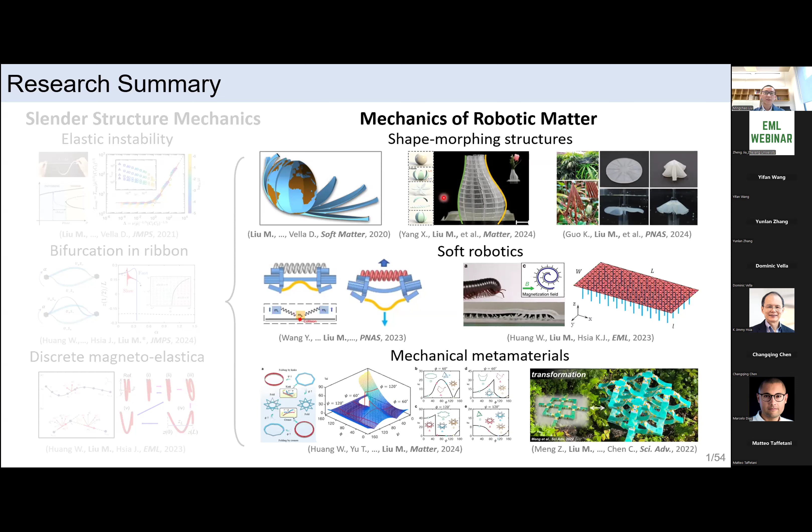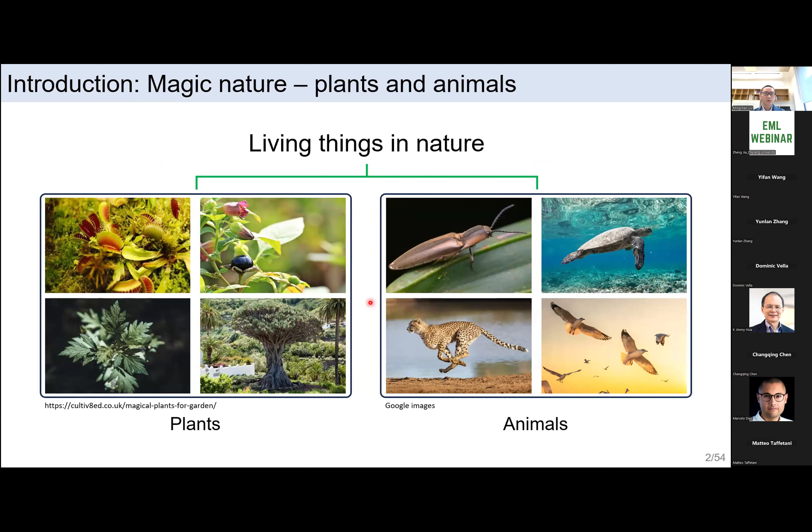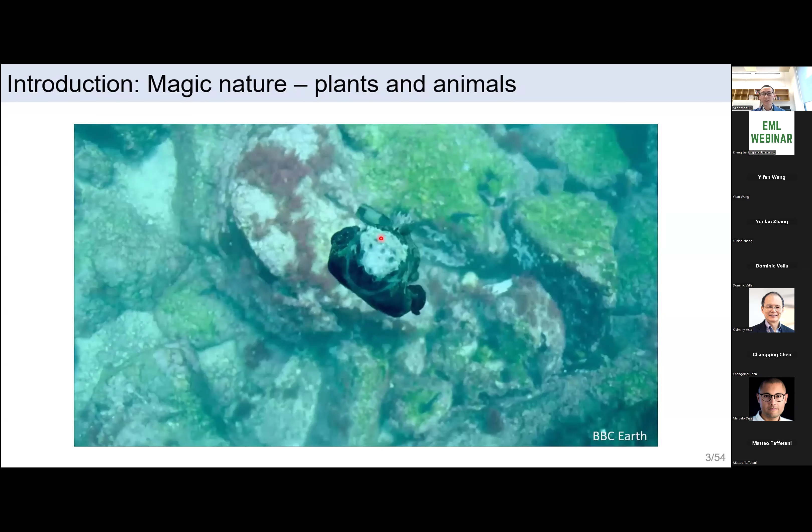First, let's look at the magic of nature. When we walk outdoors, we can see many living things, such as various plants with diverse flowers and leaves, as well as different types of animals and insects. Through millions of years of evolution, they have developed rich morphological features and efficient locomotion modes. I borrowed this video from BBC Earth, showcasing the extraordinary animals and plants in nature. Watching this video, I was amazed by the greatest wonders of the natural world. It made me think about how we can learn from nature.

It's really amazing. Saying we can make our life better might be too ambitious for a short period of time, but we can certainly explore how we can learn from nature to improve our engineering design. This is a question we would like to briefly answer in this talk.

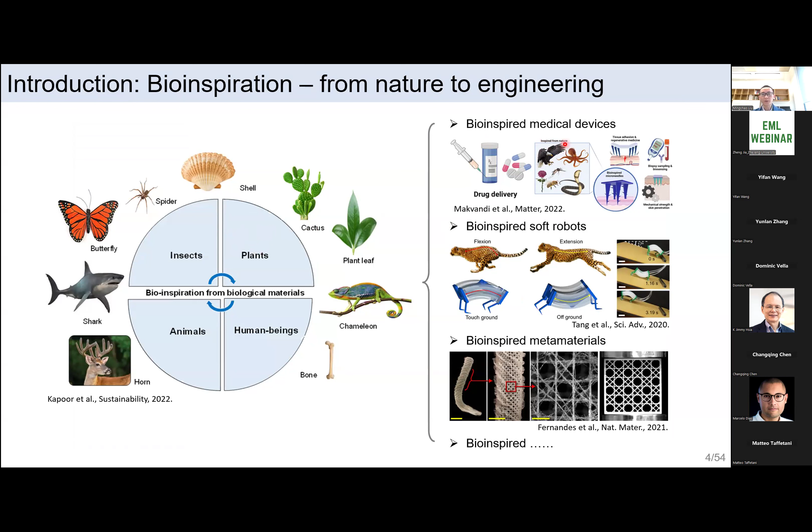In recent years, there have been many explorations in bio-inspired design, such as bio-inspired medical devices, bio-inspired soft robotics, and bio-inspired metamaterials. One particular question we aim to answer is: how can mechanics help us understand and mimic biological systems? We will start our journey in this little garden.

Our first example is the design of a morphing structure with foldable behavior, inspired by bamboo leaves—I will explain in detail later. When we talk about morphing structures, you may think about transformers. Indeed, the transformer is a very typical example of a morphing structure, but it is quite advanced. In a real research lab, what we study recently is much simpler.

For example, this is a lattice structure which can change its topology by responding to external stimuli, or even simpler, a tubular structure that can be deformed by stretching. We can refer to these as morphing structures.

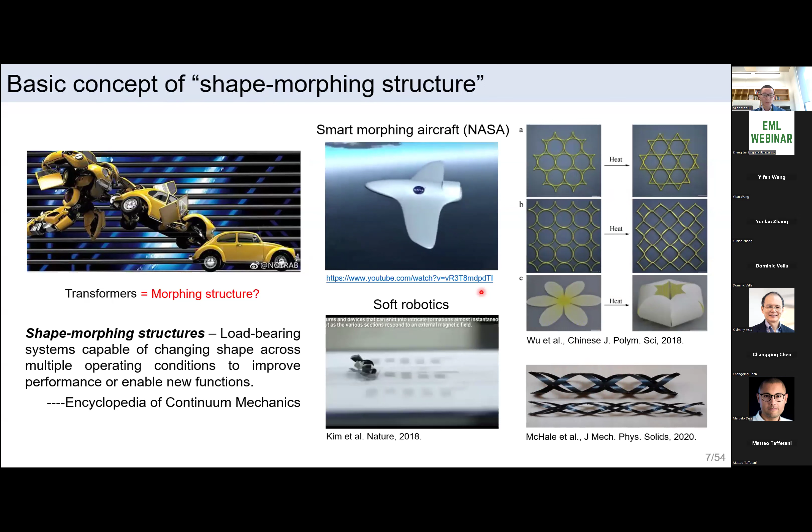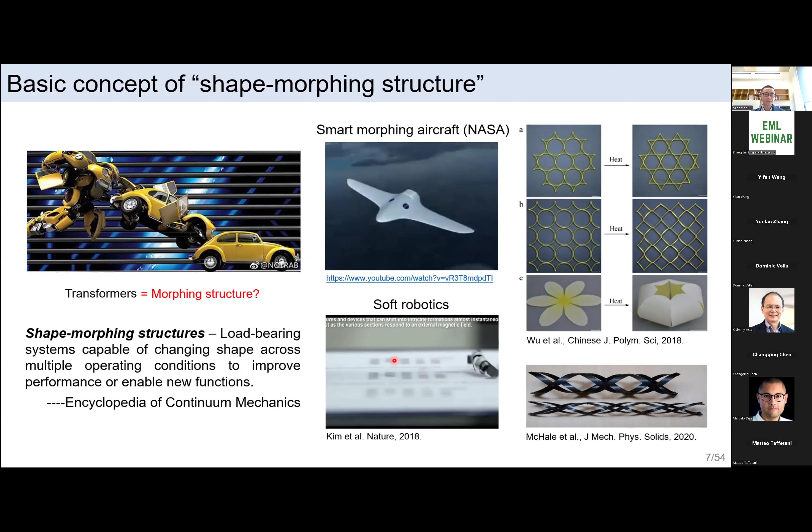The reason we are interested in morphing structures is because they have shown great potential in research areas. For example, if we have an airplane with a morphing wing, it can be much more energy efficient, and morphing structures can be applied to soft robotics to perform more diverse functions. As mentioned before, plant leaves exhibit rich morphological features, providing great inspiration for creating morphing structures.

For most of the leaves, the shape formation is based on stress mismatch, similar to this bilayer system. This stress mismatch is triggered by the differential growth of the cells. A notable characteristic of those leaves is that their shapes are normally smooth, as you see in those examples - you cannot see any sharp change of curvature. So one natural question arises: how can we achieve localized shape change?

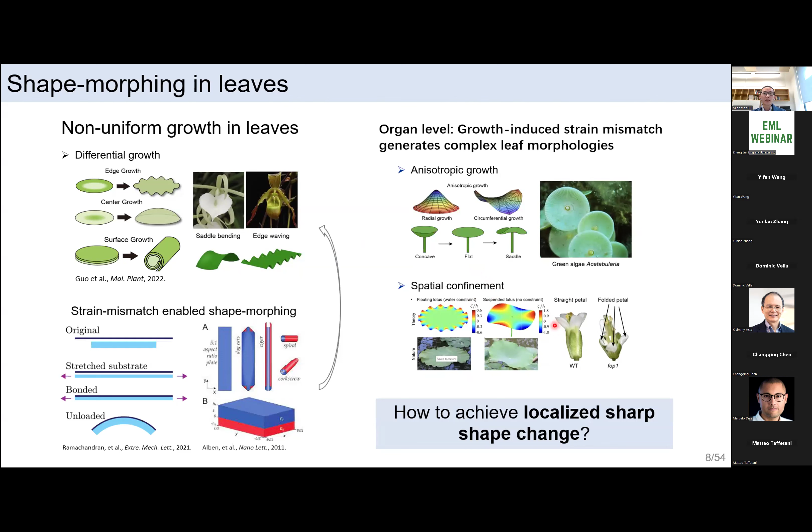The answer came to me one day when I was working on the campus of NTU in Singapore. This story goes back around two years. I still remember after a group meeting with Jimmy, I was walking from the office to my apartment. I noticed a dry leaf of this kind of plant, named Rhapis excelsa, which is very common in Singapore and also in some southern parts of China and in Taiwan. It showed a significant folded shape.

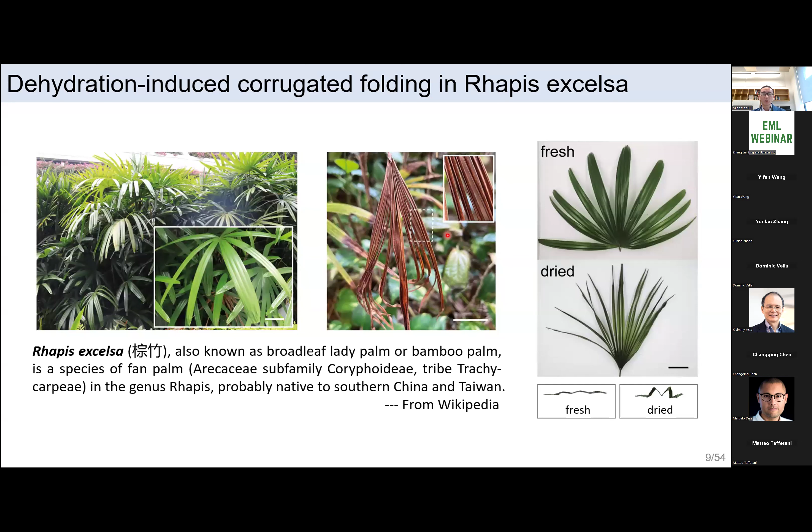Compared to the fresh state, the shape changed quite a lot. Initially, in the fresh state, it's almost flat, but in the dry state, it forms a very significant zigzag shape. This is a common folding behavior, and you may also observe it elsewhere. So what we wanted to do is understand the reason for this kind of folding, and how we can learn from it.

This is intuitive because, for the cut leaf, the water mainly evaporates from the exposed cut edges. For longer samples, the liquid needs to transport from the center to the edge, but for shorter samples, the liquid evaporates more easily from the edge.

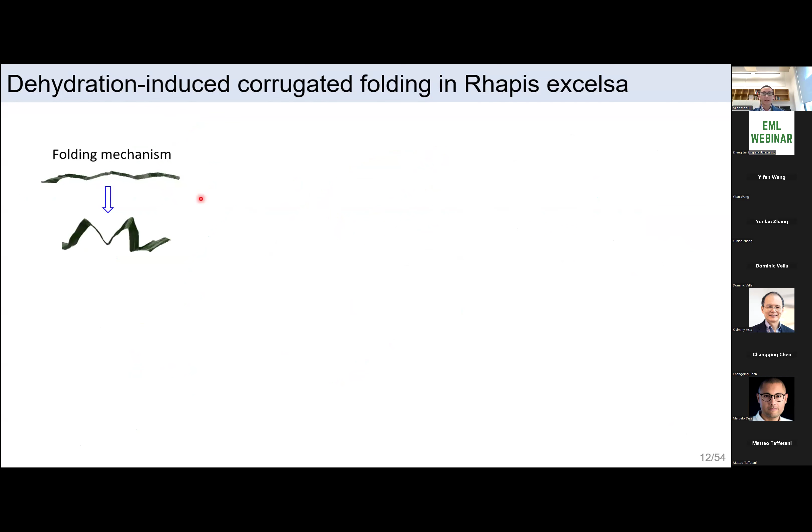So next, we want to understand the folding mechanism more clearly. By taking optical images, we can identify the most significant volume change happening in this area, which we refer to as the hinge cell.

All other areas also involve shrinking, but not as significant as the hinge cell. This circular area is a vein. You may know that in the leaf, the vein is rigid—it cannot shrink during drying, it keeps its rigidity and volume. That means the strain mismatch between the hinge cell and the vein will contribute to the folding of the leaf structure.

To test this hypothesis, we developed two FEM models. In the first model, we only introduce the vein structure, which is rigid and will not shrink during drying, while the other part shrinks. Here we use thermal strain to reflect the volume change. When we make those two parts shrink up to 40%, we didn't see any significant folding.

In the next model, we introduce a hinge cell, which reflects this hinge cell region near the vein. The hinge cell shrinks more significantly than all other cell regions. With this hinge cell, by applying the hinge strain, we can trigger very significant folding. These simulations confirm that the folding is mainly induced by the shrinking of the hinge cell.

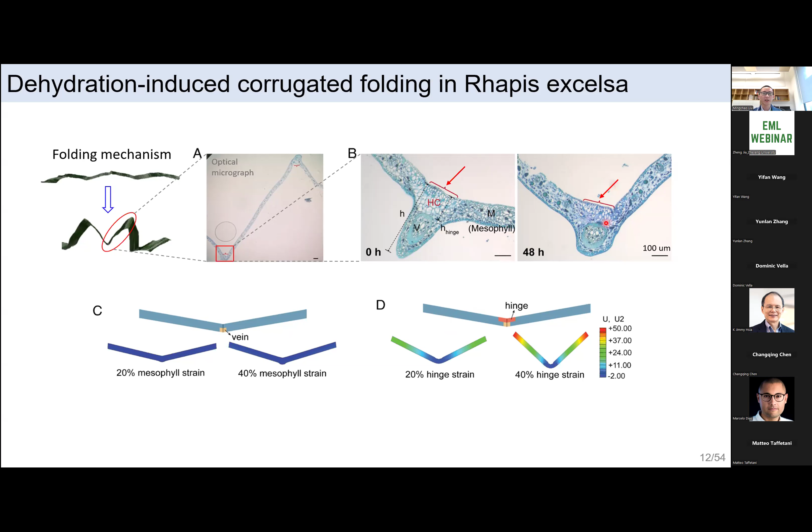Except for the folding, we also observe the bending of the leaf, such as this part. By taking images of the adaxial cell and abaxial cell of the leaf—the adaxial cell being the surface facing the sunlight, and the abaxial cell being the surface opposite to the sunlight—we find that they have quite different surface properties.

For the abaxial surface, it has quite a lot of stomata, small holes that enhance the evaporation of water. That means during the drying process, this surface may shrink more than the other side. By accounting for these features in our FEM model, we introduce a bilayer model where the adaxial side shrinks less than the abaxial side, and we can achieve this kind of bending similar to what we observed experimentally.

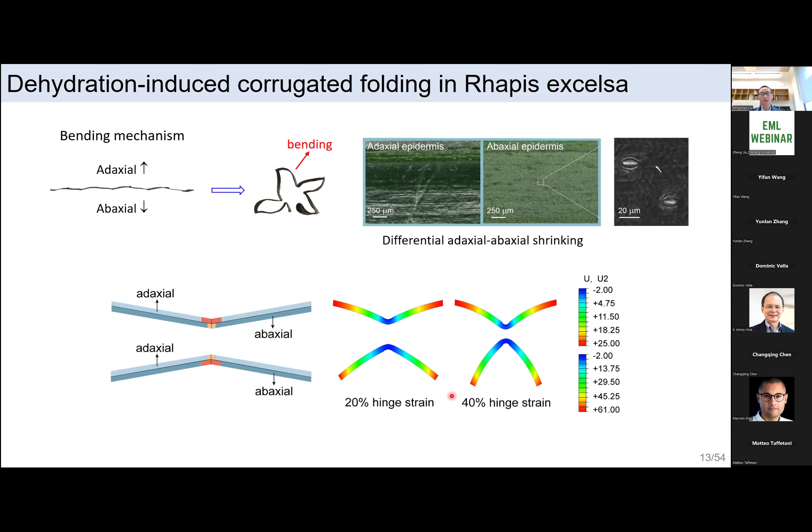Since the abaxial side always shrinks more than the adaxial side, those leaves always bend to the bottom side. So if we combine our understanding of the hinge folding and the bilayer bending into our FEM model, we can fully reproduce the morphology evolution of the leaf during dehydration. It shows that our FEM simulation agrees quite well with the experimental observation.

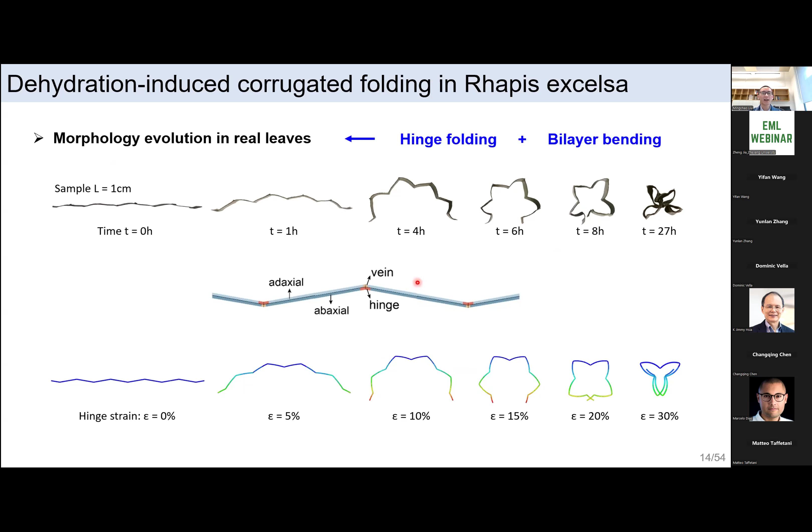So far, from our point of view, we think we understand what's happening with the folding in this particular leaf. You may be wondering what's the reason for this kind of folding—why does this leaf want to fold?

To be honest, we cannot answer these questions properly, but here we propose two potential reasons, which we refer to as the potential biologic functions, to explain why the leaf wants to fold. The first is that folding will increase rigidity through geometric constraint, which can be reflected by a simple piece of paper—if you introduce hinges, the rigidity will increase a lot.

The second reason is that the folding plus bending of the leaf will reduce water loss. This is also confirmed by our control experiments. Both mechanisms help the plant survive in extreme environments. So this is our hypothesis.

Based on our previous understanding of the folding mechanism of the leaf, we can create a biomimetic foldable device. We combine EcoFlex with hydrogel. The hydrogel is initially fully saturated with water. During drying, the water evaporates and the volume shrinks, forming a strain mismatch. This induces bending and folding.

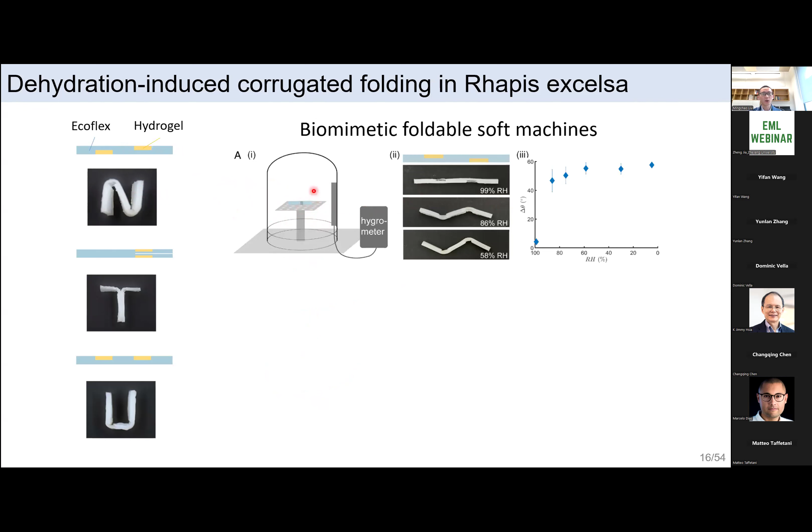By applying this kind of design, we can create a device that can be used to detect and measure humidity in the environment, since the folding angle depends on the humidity.

So another example is that we can create this kind of responsive umbrella. The working principle is that it will fold upon drying. For example, in a sunny day, your umbrella will fold by itself. When it is raining, it will unfold spontaneously, so you don't need to worry about the rain. We hope that this kind of smart machine will be used in our daily life in the future.

Foldable structures exist widely at different scales, such as protein, DNA, and brain, all involving quite a lot of foldings. Instead of those natural structures, in engineering, foldable structures also show great potential for applications such as foldable wings and foldable solar panels. For those applications, normally we need to consider the dynamics.

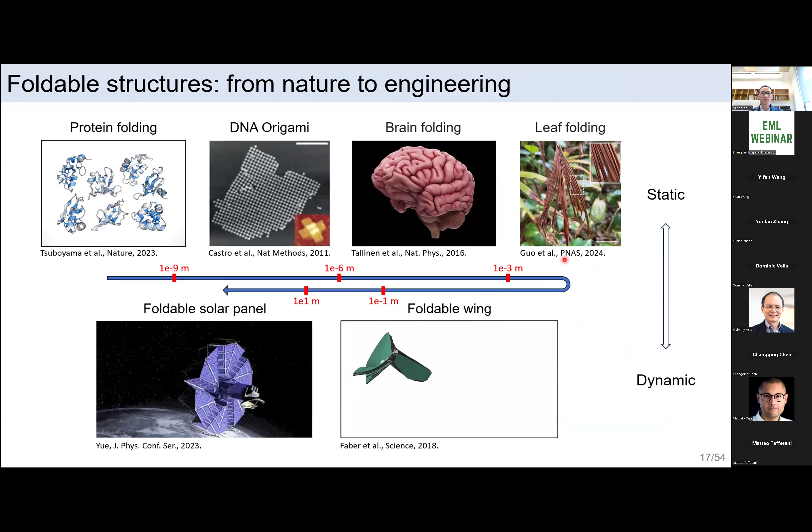Here are two examples of foldable structures. If you check those foldable structures in detail, you will find that most exhibit a single mode of folding: either continuous folding or snapping folding. For continuous folding, it is stable but normally slow. For snapping folding, it's fast, but normally it will induce a strong vibration. So we are considering whether we can achieve a foldable structure with tunable folding, meaning we can transition from one mode to the other or the other way around.

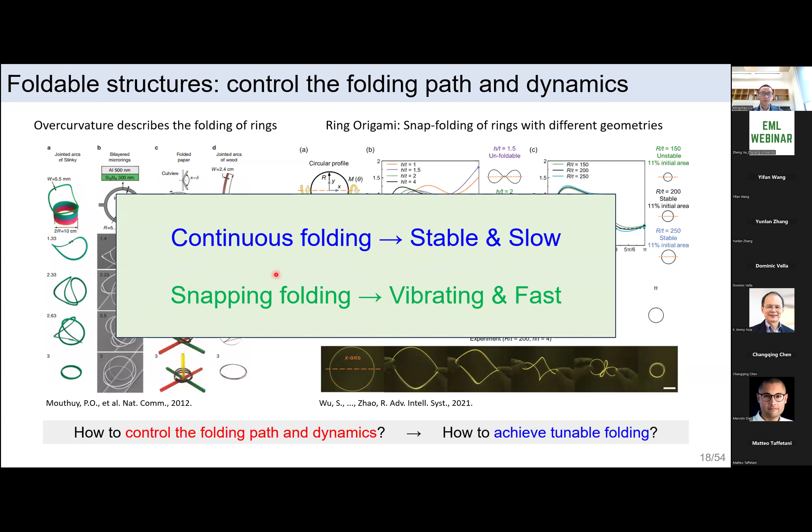For this purpose, we proposed a concept called the meta ribbon. I will explain it in a little detail. As shown here, we found that if we introduce in-plane kinks into our annular ribbon, as you see here, we can trigger continuous folding. It's quite smooth and stable.

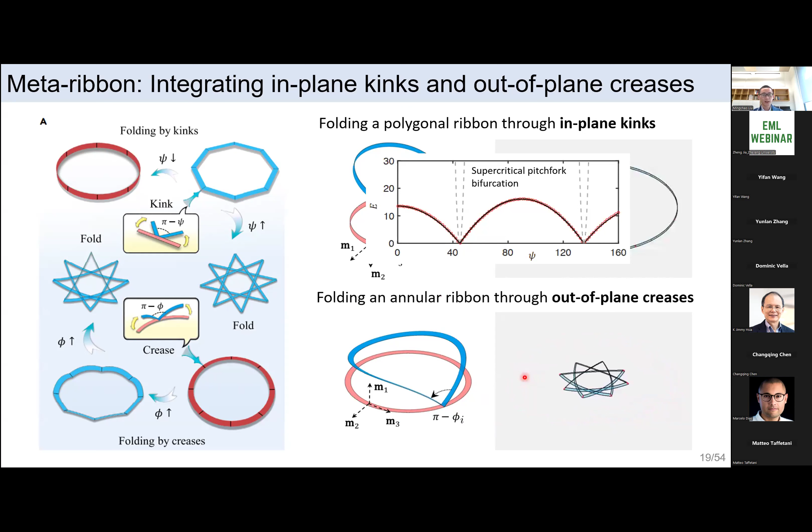We did some stability analysis and found that this kind of smooth continuous folding is governed by the supercritical pitchfork bifurcation. On the other hand, if we introduce out-of-plane creases into the annular ribbon, as you see here, we can trigger snapping folding, which is quite fast. Here we don't consider dynamic effects, so you don't see the vibration - I will show that later. By doing the stability analysis, we found this is governed by the subcritical pitchfork bifurcation.

By integrating the in-plane kinks and out-of-plane creases together into a single ribbon, we can create this kind of meta ribbon. So the foldable behavior of this meta ribbon is tunable, as we mentioned.

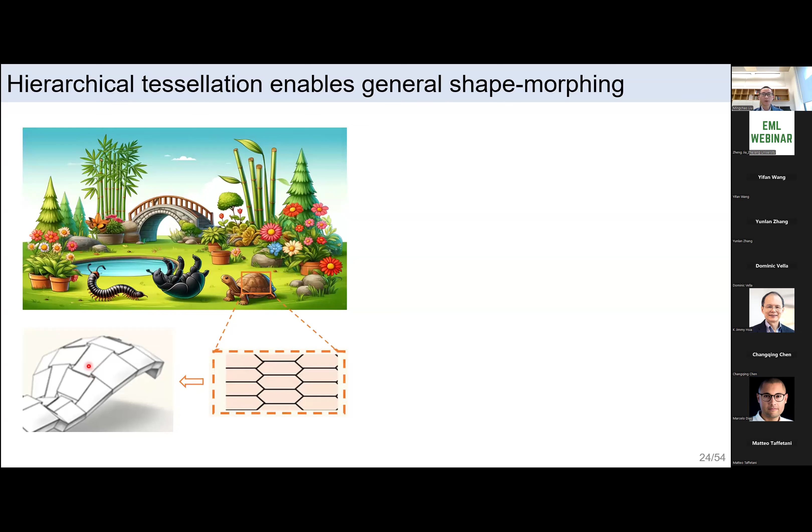This kind of principle has been adopted in old days. For example, this arch bridge is made by stone bricks with particular shapes. This arch shape can be formed by assembling those stone blocks together, each with particular geometry.

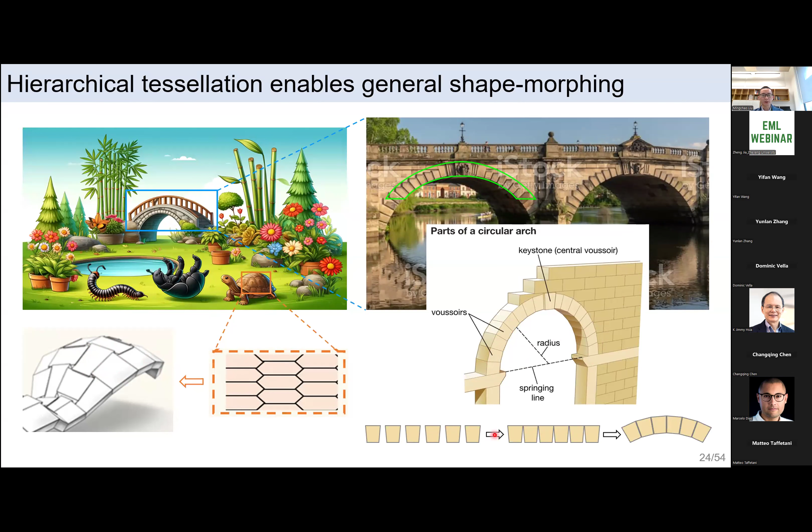So we can use this kind of principle to design a morphing structure. This principle only involves a geometric relation without any elastic information.

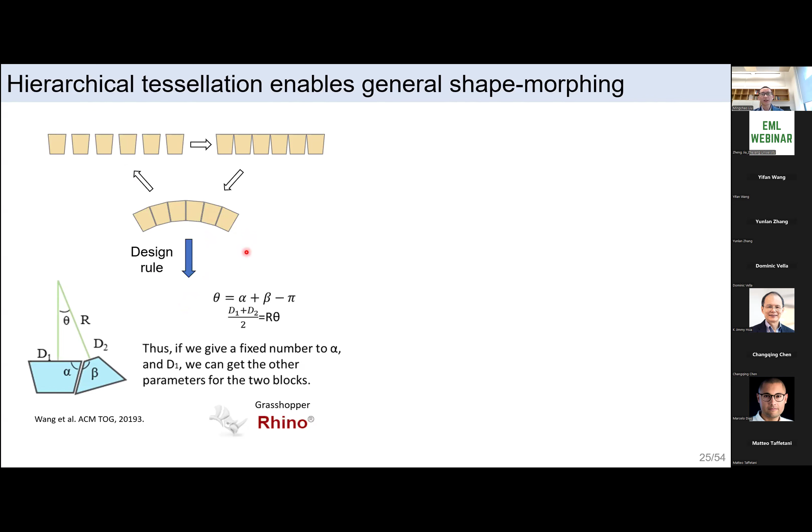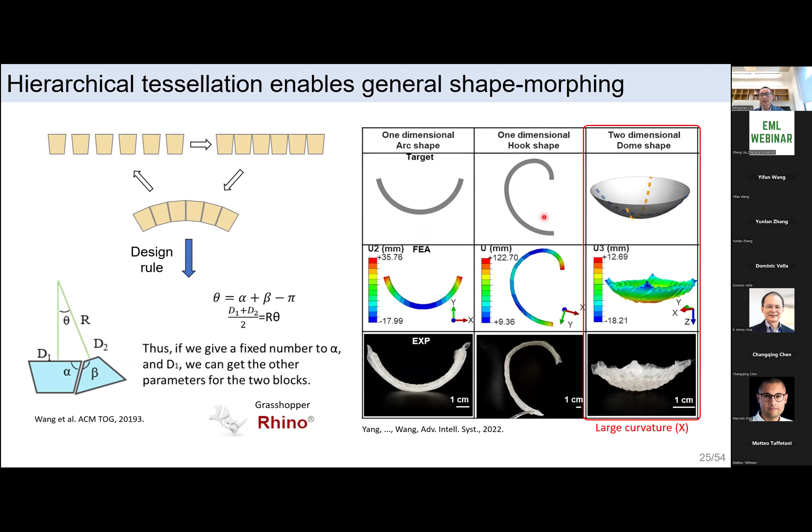This principle has been tested by Yifan's group. They tried to translate those 1D and 2D structures into particles, and by controlling the geometry of each particle, the curvature can be matched. In experiments, they printed all the particles and put them into a plastic bag. By vacuuming the bag, all the particles will be squeezed to stay together, and then they can form the target shape. For 1D geometry it works quite well, but for 2D it's quite challenging to form a large curvature. The reason is quite simple.

According to the Theorema Egregium, if you want to deform a flat shape to a curved one, you need space to store extra materials. So you can imagine that if you want to design a full sphere using this kind of way, you will encounter problems since there's no space to store the materials of the bag.

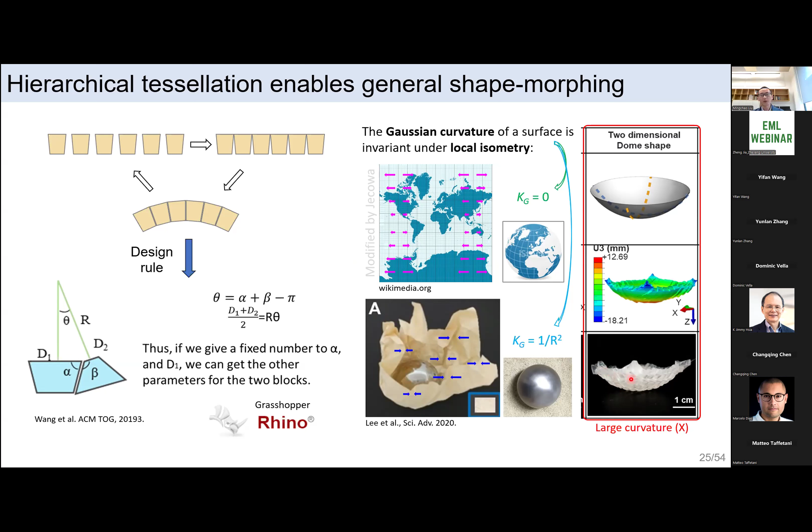To overcome this problem, we get inspiration from biological systems. So we propose a new design principle named hierarchical tessellation. What we are doing here is choosing a sphere as our target. We first cut it into multiple pieces at the global level.

Each piece is in a curved state. To match the curvature, we tessellate this curved piece into individual particles at the local level. If we assemble all those particles together, we can match the curvature of each piece. This is similar to what we mentioned about the arch bridge. If we assemble all those particles together, we can form the target shape.

This kind of design is quite simple, and each particle can be fabricated using 3D printing. So it's quite easy. You can choose how many particles you use — more particles, or more pieces you cut, will make the final structure closer to the target.

We can also introduce geometry interlocking, which will enhance the rigidity of the morphed structure. Here we show a simple example.

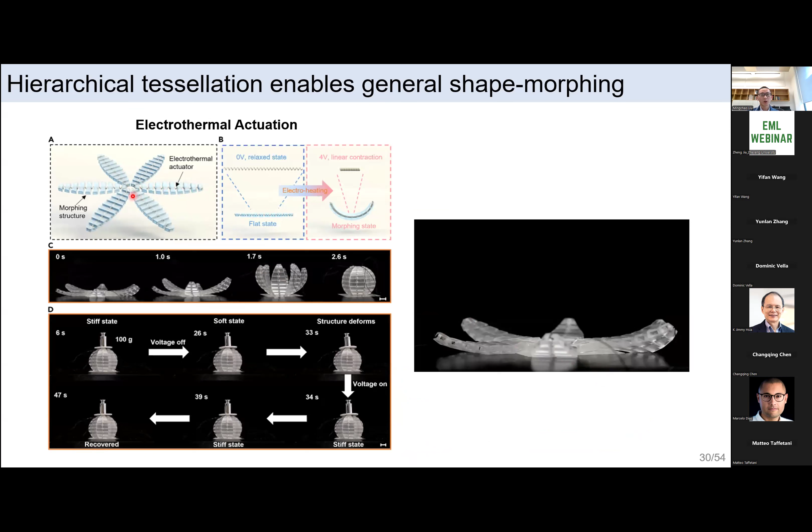Those wires are stretched initially, and when we apply voltage, they get heated and become shorter, triggering the morphing. So we can also change the stiffness of the morphed structure by controlling the voltage state.

The final thing I'd like to highlight for this kind of morphing structure is that it can be applied to electric devices. As we know, fabrication of curved electric devices is a major challenge.

But here we fabricate all the particles in a flat state. That means we can easily print electric circuits on the planar state like this, and then make it morph to the 3D shape, performing the function in the 3D state.

Here we show one example. We printed the circuit and integrated an LED light onto the morphing structure at the flat state. Initially it's flat, so each particle is separated, and the circuit is not conducting.

Once it morphs, the particles will contact their neighbors, so the circuit becomes conducted and the LED light turns on. When you release the actuation, the particles separate again and the LED light turns off.

So far we have shown two examples of bio-inspired design of morphing structures assisted by mechanics principles. Actually, other mechanics principles can also be applied to design morphing methods, such as strain mismatch, elastic instabilities, origami, or kirigami. Today, due to time limitations, I only include two of these mechanisms.

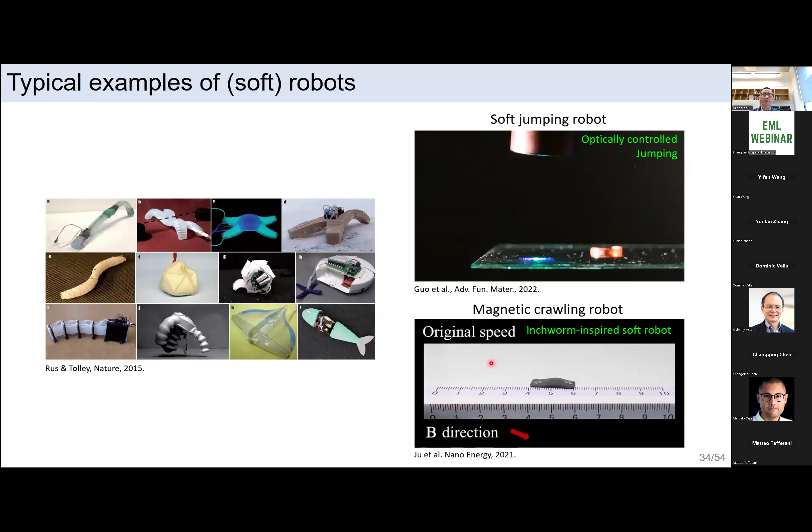There are two examples: the top one is a jumping robot triggered by light, and the bottom one is a crawling robot triggered by magnetic field. Let's first look at the jumping robot.

We would like to design a jumping robot with high efficiency. As we know, for humans, what we do is a squat jump. This kind of mechanism mainly relies on the energy release of our muscles. To be honest, this is not so efficient.

So when we look back at the garden, we found an excellent jumper—an insect famous for using its body in a spectacular way to get off the ground: the click beetle, which can utilize its back and feet.

The snap-through ability releases pre-stored energy, and as you see, it can jump quite high—even more than 30 times its body length. Compared to humans, it's quite excellent.

So we are wondering, can we design a jumping robot by mimicking this kind of mechanism? The answer is yes. A group from UIUC led by Sam achieved this kind of design. They drew inspiration from the click beetle and designed an insect-scale jumping robot. The design is quite simple, as you see here. This is an elastic beam, made from steel in their experiment.

Initially this beam is flat, so we can compress it to make it buckle into a curved state. On top is an artificial muscle that will shrink when we heat it up. At the critical state, when you heat the muscle up, it will deform the two edges of the robot body, forcing the beam to jump from the top to the bottom while snapping through.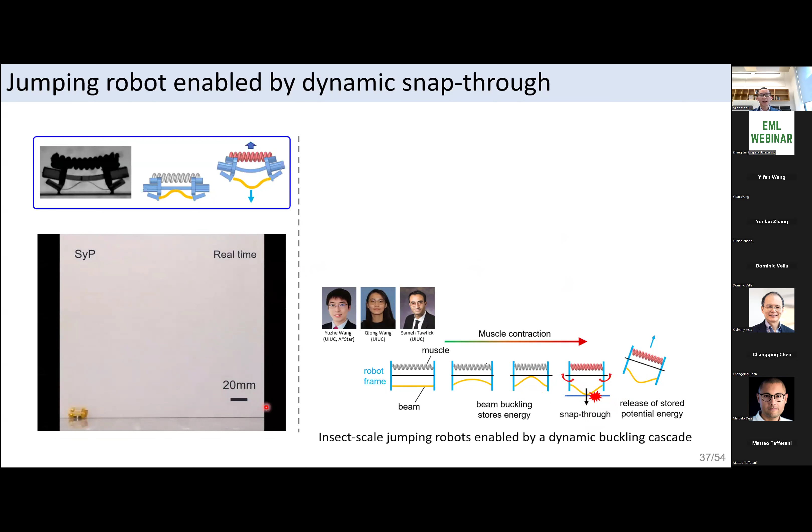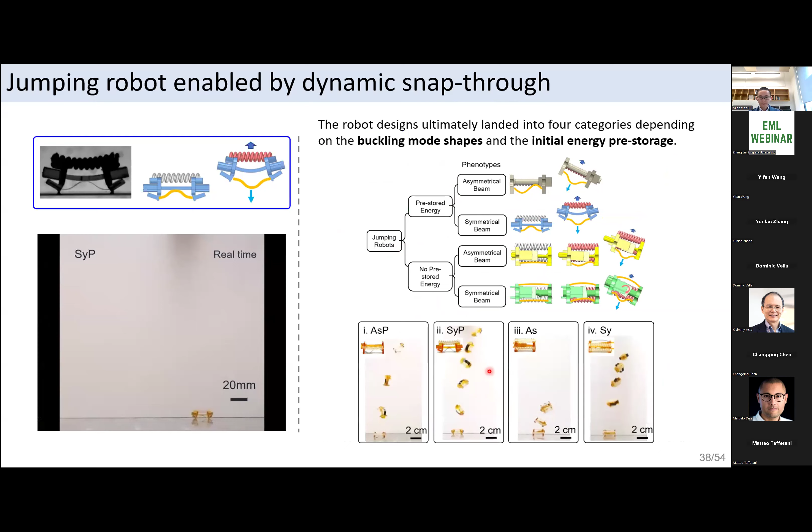It's fascinating. Since we had done some fundamental work on the dynamic snap-through of beams with Dominic and Michael, Sameh contacted us to see if we could work together to develop a search model to predict this tiny jumping robot's performance. Based on this design, 4 types of robot can be developed depending on the buckle shape of the beam and whether there is pre-stored elastic energy. They all show good performance. Our goal is to develop a model to predict the jumping performance.

One option is to consider the full process of this deformation from here to here, which also involves dynamic contact. But here we didn't adopt this option. Instead, we tried to simplify the robot system into a mass-spring model like this, which is quite simple. The key components are 2 masses: a central mass corresponding to the beam, and an edge mass corresponding to the body.

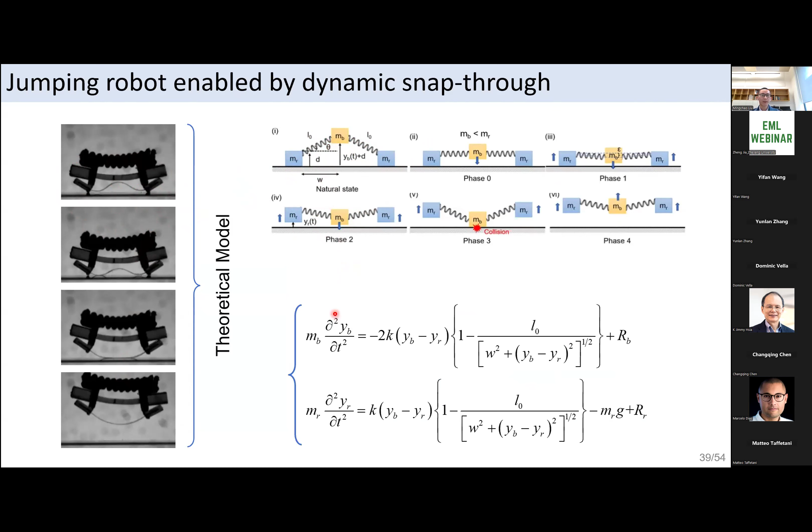The energy stored in the beam is reflected by the deformation of this spring. So we can easily write down Newton's second law to derive the kinetic equations for those 2 masses, and then by applying different boundary conditions, we can solve this system easily.

Here we show that our model can predict the experimental data quite well. This data is the displacement as a function of time for 4 different types of robot. One thing to notice is that there's a free parameter K, the stiffness of the spring—it's a fitting parameter that we need to fit from the experiment data.

What we did is choose one experimental data point to do the fitting, then use that fitted value to predict the whole group of data. It shows that the agreement looks quite good. We can also predict velocity as a function of time, which also agrees quite well.

Based on the velocity results, we can also calculate the acceleration, as you see here. The maximum value of the acceleration is quite high—even up to 250 G. It's a huge value.

One thing we can highlight here is that by using our model, we can do the optimal design of this kind of robot. For this robot, one key parameter is HR, which measures the distance between the bottom center point of the fully snapped beam and the edge of the body. We refer to this parameter as the restricting height.

This kind of millipede robot, as you see here, millipede insect, is quite interesting. To mimic its locomotion, a lot of designs have been proposed. One particular example is the magnetic cilia robot. Here, those legs are made by magnetic responsive materials. By applying a rotational external magnetic field, as you see here, those robots can move through either the rolling mode or the crawling mode. These experiments are really beautiful, to be honest.

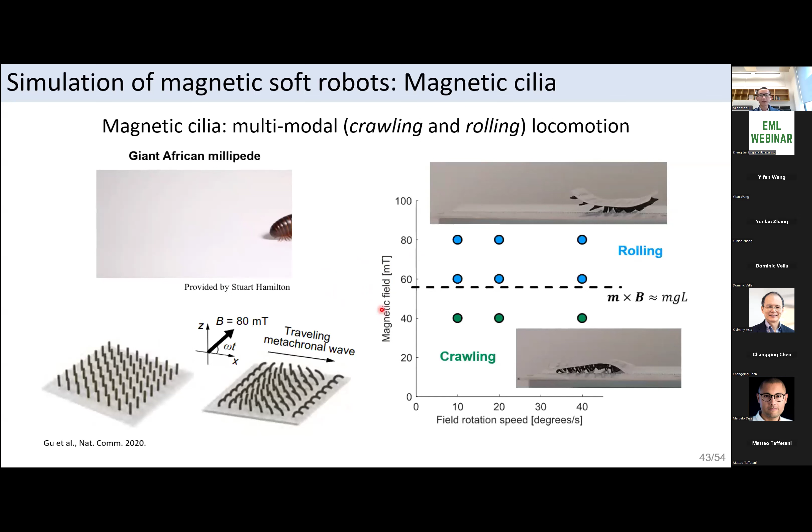But one challenge is how to efficiently design a robot with good performance. The traditional way is by doing trial and error in experiments, we do 10, 20 rounds of experiments to check which group of parameters is more efficient. So what we are thinking is to develop an efficient numerical framework to simulate the robot behavior.

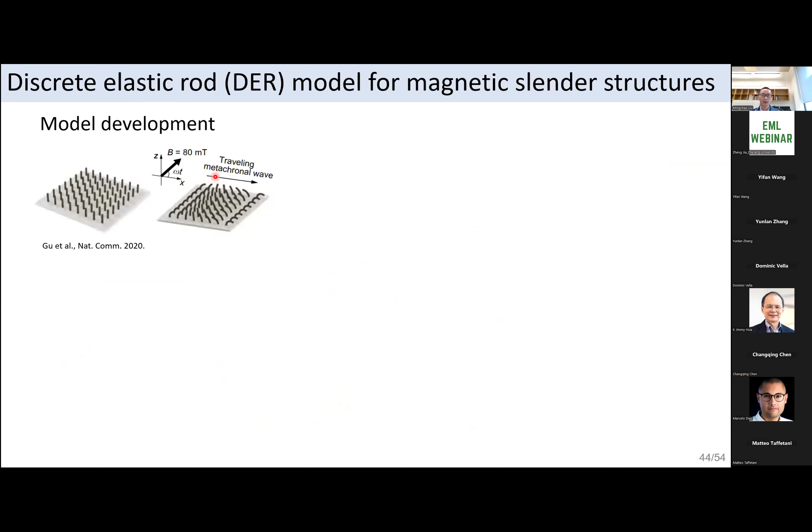Here we adopt a framework based on discrete differential geometry. This type of method is popular in computer graphics, for example in making movie special effects. Recently it has been adopted in the solid mechanics community. Here we include the magnetic elastic coupling into the discrete elastic rod framework.

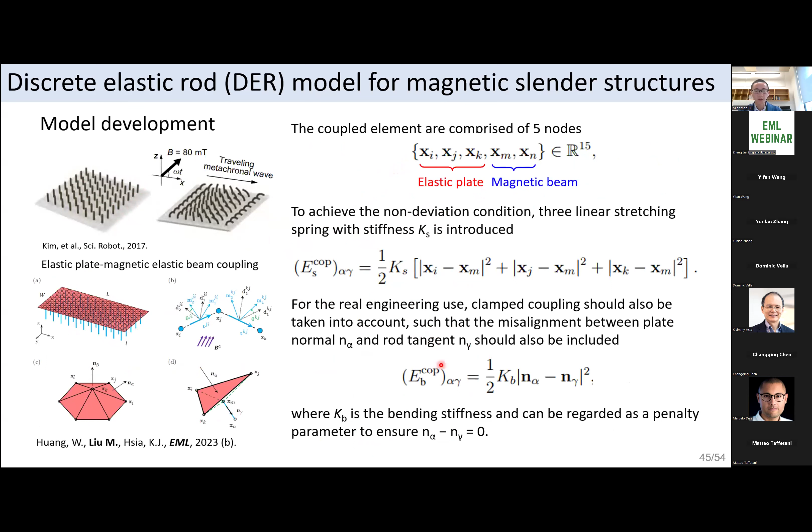We also need to introduce elastic plates and consider the interaction between the rod and the plate. So here we write down the coupling energy for both stretching and bending, and then we can solve this system numerically.

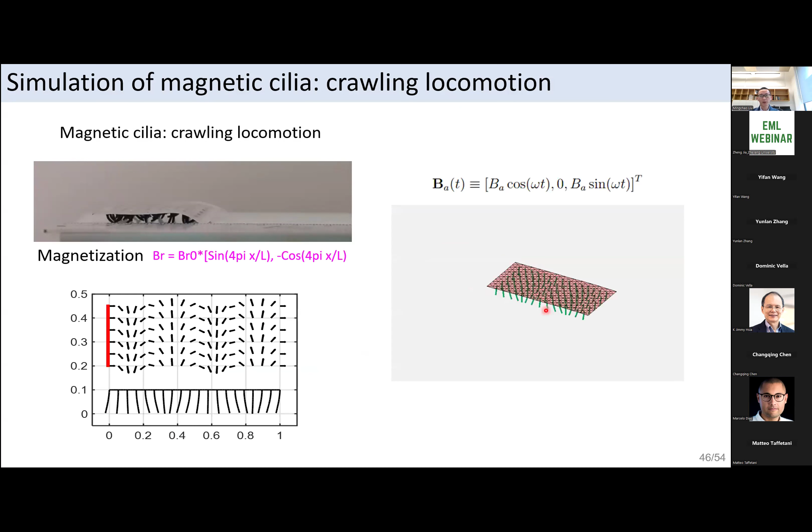By applying this kind of numerical model, as you see here, we can simulate the locomotion of this magnetic cilia robot. Here is the crawling mode. It shows that our simulation can successfully reproduce the robotic behavior.

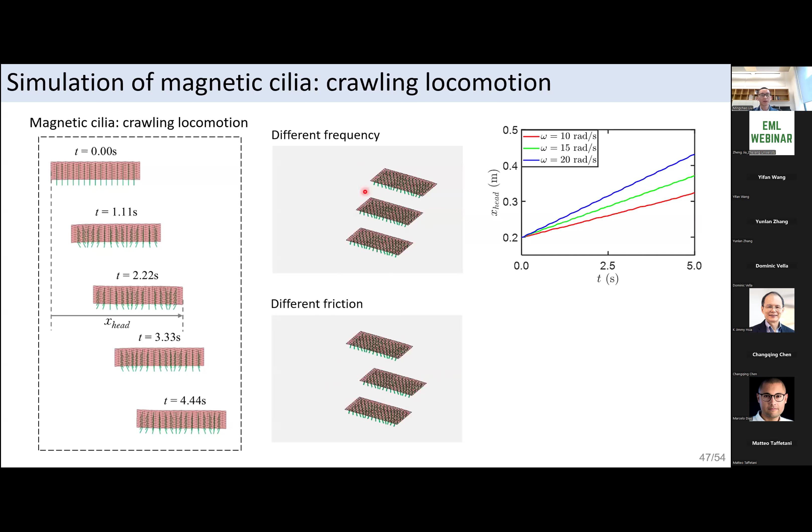Since our model is very efficient, we can run a lot of simulations in a short time to test the parameters. For example, we can test the effect of the frequency of the magnetic field and also the friction between the rod and the substrate on the locomotion efficiency. We also proposed a strategy to achieve a non-straight pathway by controlling the actuation locally.

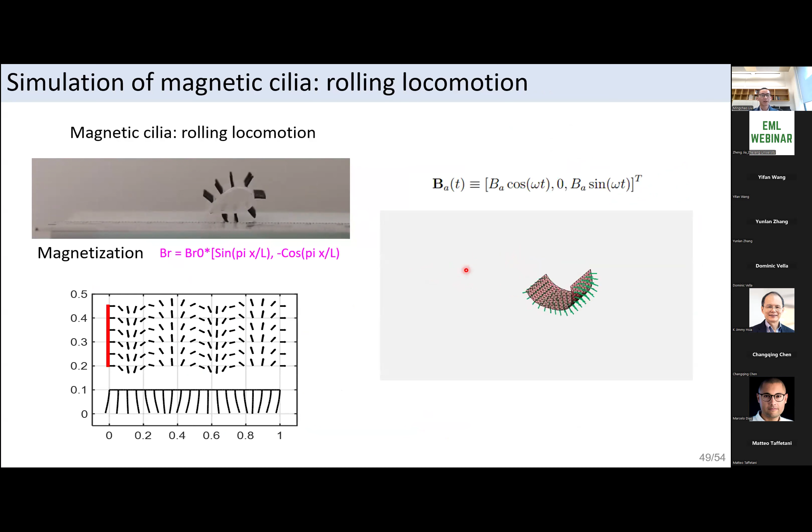Similarly, we can also simulate the rolling locomotion. We only need to change the distribution of the magnetization and also the stiffness of the plate, and then we can reproduce the rolling locomotion. We can also test the effect of different parameters on the locomotion efficiency.

To be honest, this is just a very preliminary attempt at simulating soft robots. We would like to push it forward in the future, for example to understand the evolution of biological movement or to achieve the optimal design of these kinds of robotic systems.

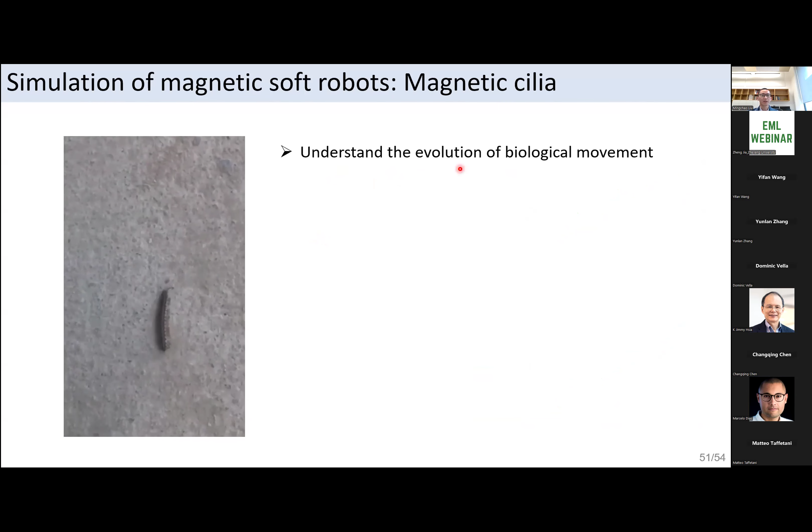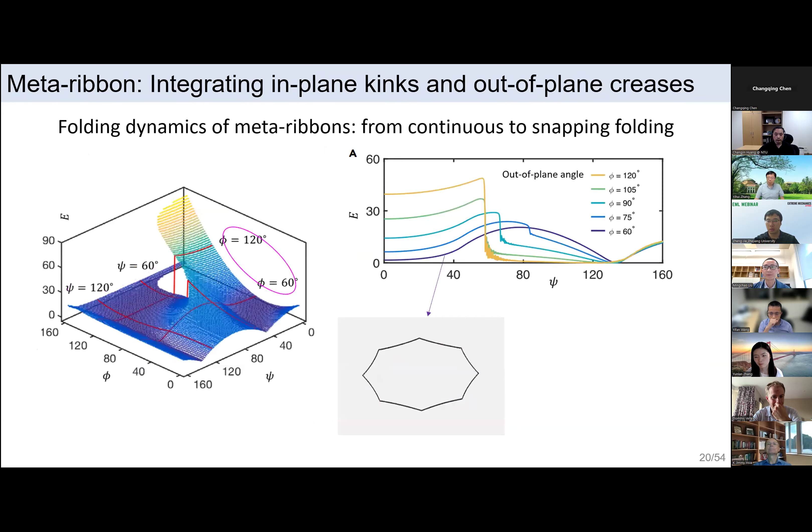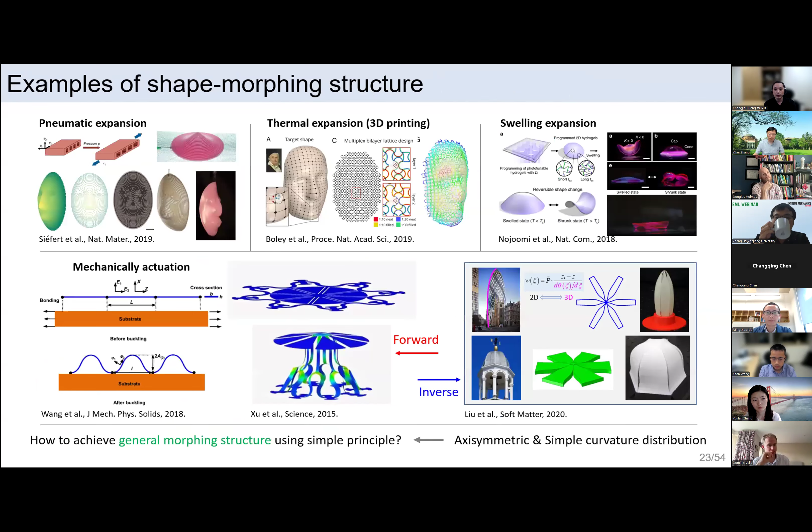I do have a minor question regarding the first part of your talk on dehydration-induced folding. We know that with conventional engineering materials, folding behavior can usually undergo many cycles, although it can fatigue over time. My question is: for those biological systems, have you looked into the repeatability of the folding process? Is it really repeatable, and how many times can it undergo this before it loses the folding capability?

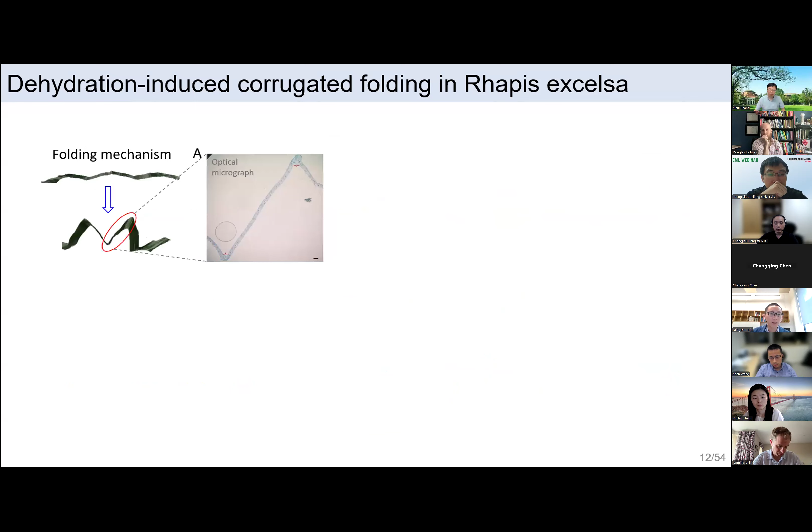That's another very good question. Indeed, we tried to test the repeatability of this folding behavior, and it depends on whether the leaf is still alive. For our experiments, we need to cut it out from the complete leaf. We tried two types of experiments. One is keeping the whole petiole of the leaf and doing the drying and folding experiment by controlling the environmental conditions. It's basically repeatable, but I'm not sure exactly how many times—at least 3 or 4 times is doable.

But for cut leaves, it's quite challenging, since once you've done one cycle of the folding experiment, part of the cells are going to die, so it's not fully repeatable. I think it's a good question for us to consider—if we want to directly use this kind of biological system to behave like a machine, rather than just doing biomimetic design, we definitely need to carefully consider the repeatability, or how many cycles it can be reused. We considered that only very preliminarily; we didn't do too many concrete tests. So I think it's a good question for us to think about in the future.

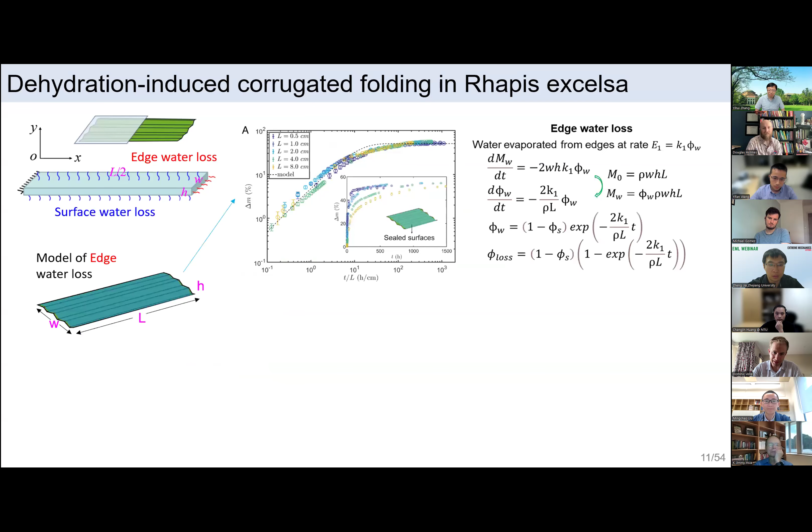Yes, Mingchao, congratulations on the wonderful work—very inspiring and informative. I have two small questions. The first is regarding the meta ribbon you studied, which is very interesting, noting that continuous folding shows very different behavior from snap-through folding. So I was wondering how the loading rate or release velocity affects the folding behavior.

Yeah, actually it's a very good question. To be honest, here we didn't test the loading rate effect. As you say, all those results are generated by numerical simulation, so we assume the actuation is very slow compared to the snap folding—compared to the short period of the snapping folding speed. So the loading speed is much slower than this folding process.

But it's a good question—we do have one figure in the supplementary of this paper where we test different loading rates. Since for dynamic instability we have some kind of delayed bifurcation, you may observe the delay of this snap-through instability. But regarding the effect of loading rate on the folding dynamics, to be honest we didn't explore that so far. I think it's worth having a more concrete exploration in the future to combine the dynamic loading process into the dynamic folding process.

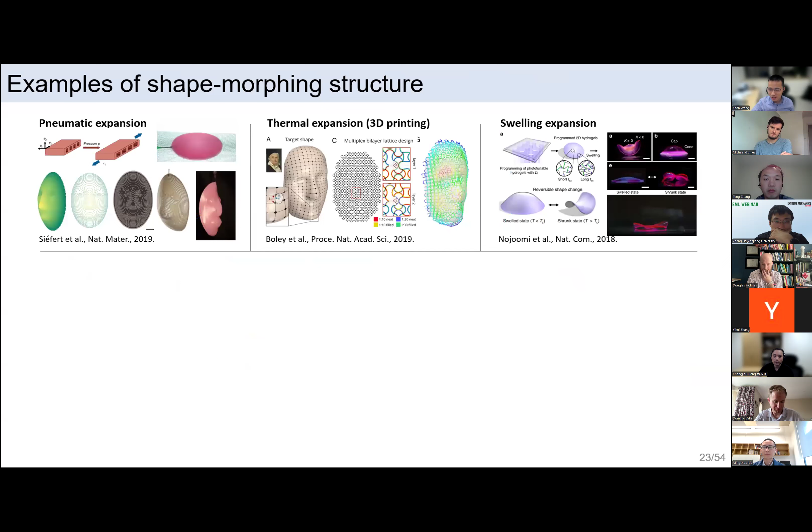Yes, hi, thanks Mingchao, thanks for the fascinating talk. My question is actually about the morphing structure - you've mentioned a lot of interesting morphing structures, right? We also published a paper together, and I remember when we sent the paper to the editor or reviewer, they asked what practical things we could make out of this that could be useful, right? And we were scratching our heads about what we could make that's really useful.

When I actually think about it, for these morphing structures, if we make them really small, like nano or micro scale, perhaps like what Yihui did with microscale electronics, that's quite useful. Or if you make some nano or microscale drug delivery devices, right?

And if you look at the very large scale, huge scale, like aerospace structures, that's also useful, like satellites, deployable structures, things like that. But if we look at the scale in between, like the tabletop scale, when we make something on this centimeter or tens of centimeter scale, what can we really use it for? At that time, we didn't have a very good answer. So I wonder whether you have a better thought about this now.

Okay, yes, thank you very much. Yeah, it's also a very wonderful question. I'm also always asking myself about this question. I still remember last year when I visited Tsinghua, I also asked Yihui about this question, and I got quite a lot of inspiring answers from him.

Recently, I'm based in the school of engineering, in the department about electrical engineering, double E. One professor in the electrical department is working on antennas, some device to control the electromagnetic wave. When I showed some of our work to that professor, he's quite interested in using this kind of structure, for example the morphing structure, to be a reconfigurable antenna. So I think we may be able to combine this design concept with antenna design.

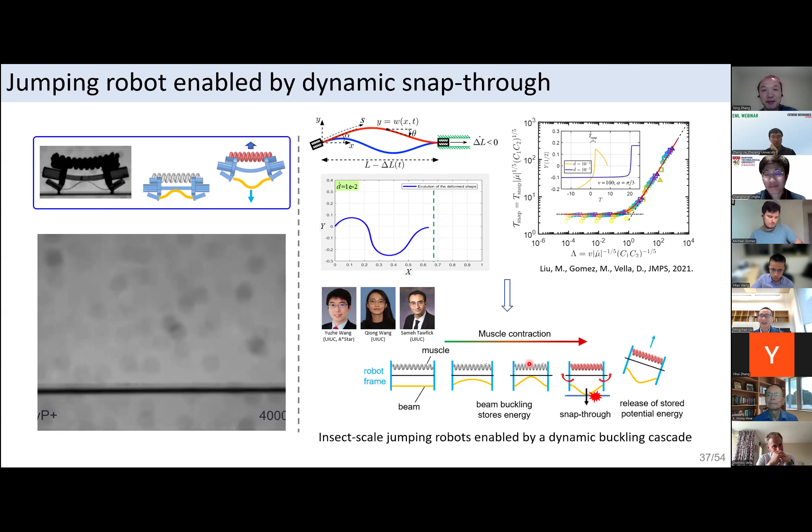So I think you answered my question very well. Maybe just a follow-up comment: whether you've listed biological examples, whether we can find some creature, either plants or animals, that are large and can also jump very high. Maybe we can find other inspiration from nature, not from insects, but from other animals for scaling up, right?

Indeed, it's a very good comment. I always try to find inspiration from nature to give us some impression of how to create a more efficient device. As you see here, this kind of snapping mechanism only happens in small scale insects, not large scale animals or something. I'm not 100% sure, but I think for large scale animals, for example humans, we always use the squat jump. Maybe there are similar mechanisms for large scale animals, but all those things are not as efficient as the click beetle.

I don't have too much a more relevant example so far. If I get some example, definitely I will share it with you.

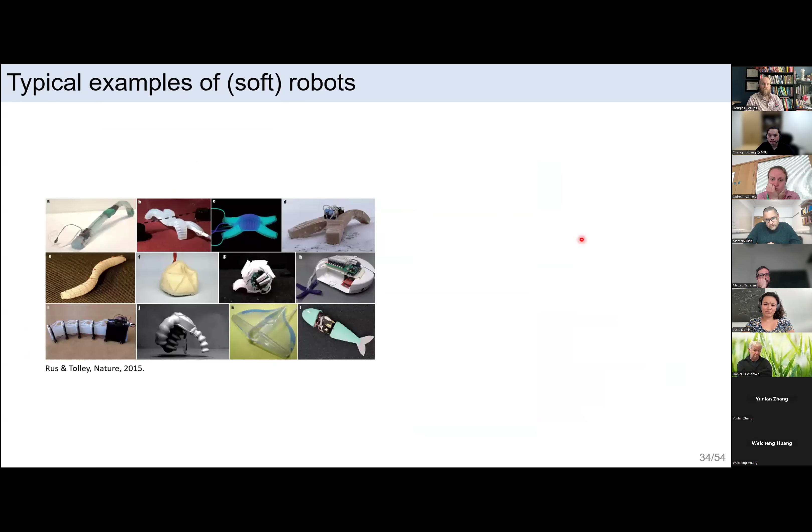I have another question also related to the multi-stable or bistable for your meta ribbon. You showed this very nice energy landscape, and I think it's very good that you have two variables to calculate the deformation. Can you comment on, for a general structure, multi-stable or bistable, how can you get this nice diagram? They may have multiple variables controlling configuration, not only 2 or 1.

Yeah, I think it's also a very important and excellent question. So here, as you mentioned, we are lucky because we introduced the in-plane kinks and out-of-plane creases, so we have 2 angles, psi and phi, corresponding to the in-plane and out-of-plane angles. So they are already there, it's clear, and we are clear to understand what's the physical meaning.

But for some of the more complex structures, it's not easy, to be honest, to find what parameters to describe the energy landscape. So the only thought I have is trying, even for most complex structures, to simplify it into a very simple system. For example, our robot we simplify as a mass spring system. Even though this mass spring system doesn't fully reproduce the physical features of the real robot, we can more easily get physical insight from this simplified system. I think this is one potential way to try to simplify the complex system.

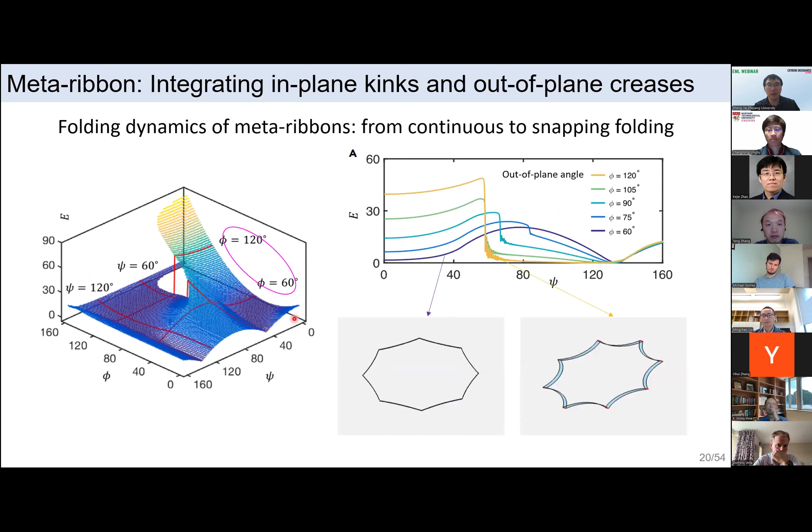Thank you, Dominic. Thank you, Mingchao, for this wonderful talk. I have two questions. The first one is about your work on the dehydration process of the long leaf. You studied the dehydration process of that long leaf by both experiments and simulations. In the experiment, I think you cut off the two narrow ends of the leaf, and the width of the remaining part of the leaf is almost uniform.

Then I can imagine you can model the dehydration process as a plane strain problem, I guess. But if you don't cut off the two ends, then the width of the leaf along its longitudinal direction is not uniform anymore, and it means the edge of the leaf has a curvature. My question is, will that curvature affect the folding process, not the folding, the dehydration-induced folding process of the leaf?

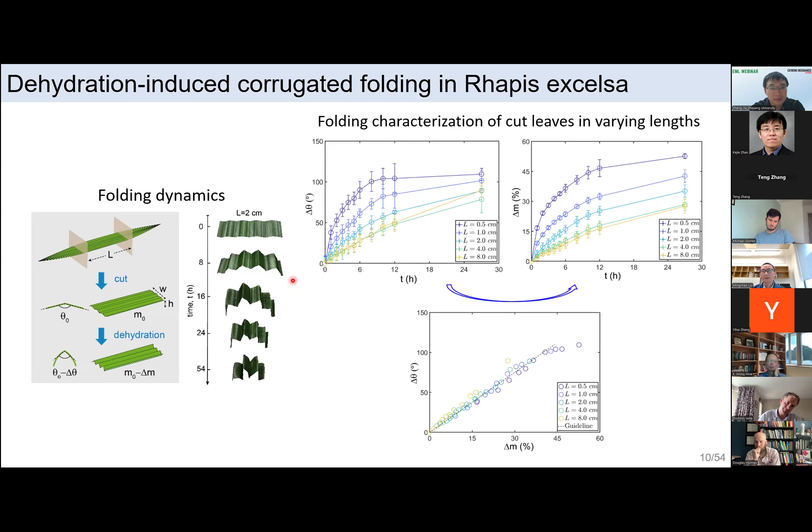Okay, so another excellent but challenging question. We didn't do any quantitative measurements about that particular case, but we do observe some of this kind of full range of leaf folding.

I believe there will be some effect since there's a boundary constraint on the folding process, but how that effect can be quantified, I have no answer so far.

But instead of that kind of effect on the folding process, one thing I would highlight is that if you keep the full piece of leaf, you will see the deformation is somehow not as uniform as a cut piece. This is because of the geometric constraint from the boundary.

This is also quite interesting - here we only explore the folding behavior as the simplest part, but how to combine the boundary constraint to form more complex geometry is also a challenging problem.

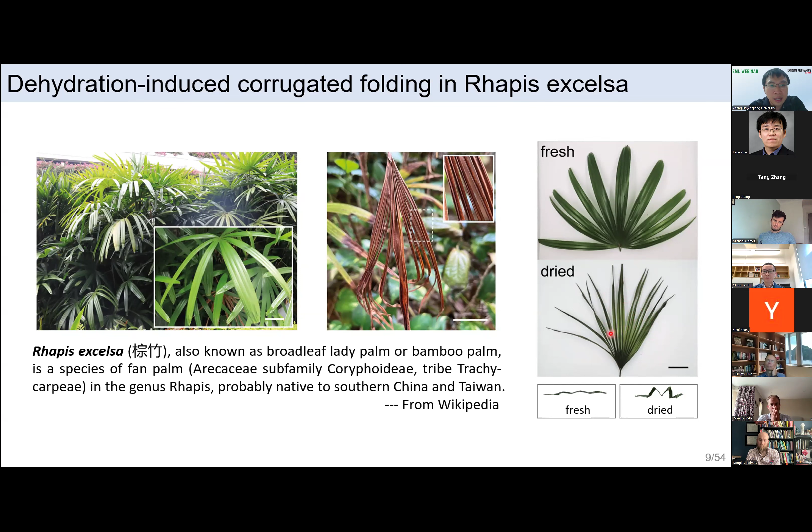Okay, thank you. My second question is about another work on the hierarchical tessellation method, which is used to design 3D surfaces with almost arbitrary geometries. I can imagine people doing this kind of design by trial and error, but that would be very time consuming. So my question is how to efficiently design a target 3D geometry.

Yeah, so actually we do have an algorithm - it's a numeric code which, when you input a target geometry, will automatically give you what the cut pattern should be.

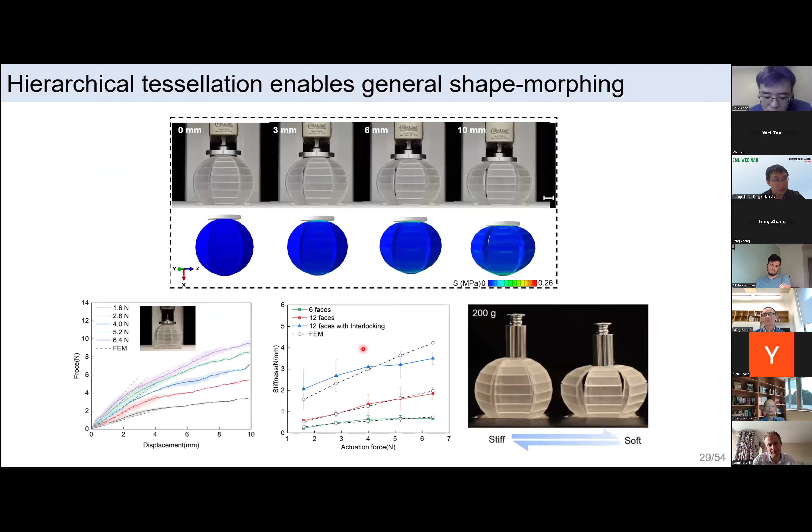So as someone not working in this field but generally interested, if I want to achieve a structure, I would like to look up a website or toolbox for how to achieve that kind of structure. My question is: using the same mechanics principles, can we have a kind of library or encyclopedia of what kind of structures can really be achieved? Is there such a database, or is it worth the effort to make such a library?

Okay, yes, thank you very much. This is not a naive question, it's a very high-level question, actually. To be honest, to my knowledge, I don't think there is this kind of library or database available.

When we were writing this review paper, I did discuss this kind of idea with the first authors. We were thinking maybe we can make, not a very comprehensive database, but at least something more comprehensive than here. This is a short review paper, so we only summarized 5 different types of mechanism, also based on mechanics.

As Yihui or someone else mentioned, you could also include some smart materials or different types of actuation. So we're thinking maybe we can make a small database or small table to summarize all that information, both mechanics and functional materials together, to help guide the choice if you want to make a particular type of morphing structure.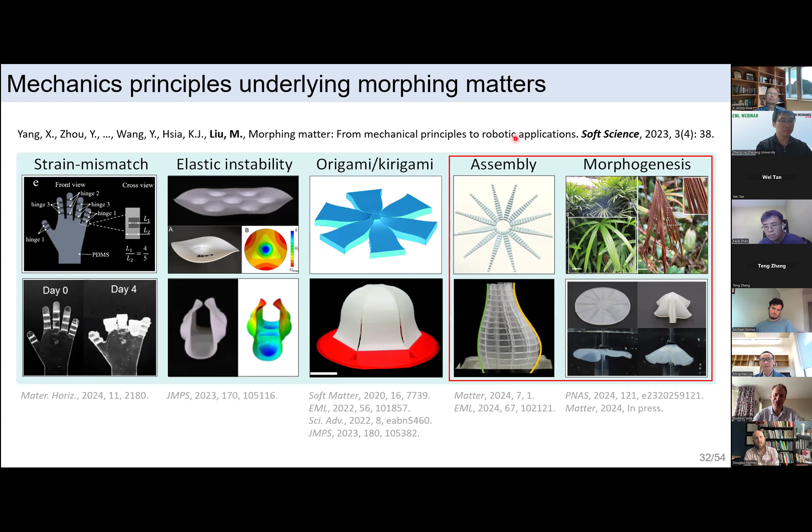Thinking a little bit about the stuff you showed with the magnetic cilia as well, I don't know how easy it is to use Weicheng's numerics to just kind of explore the design space, but also to get ideas for where might be interesting bits of design space to go.

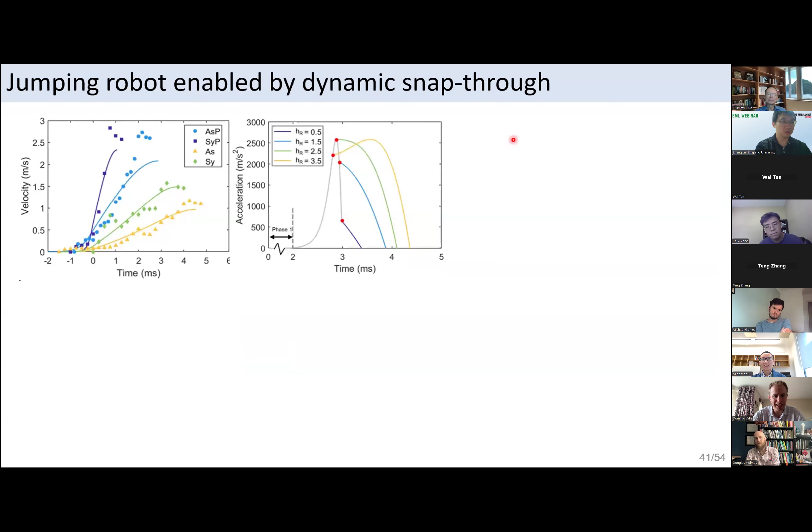Instead of the magnetic stuff, we have some ongoing work with Weicheng to explore the optimized design or inverse design of this kind of jumping robot. The numeric simulation based on discrete differential geometry is quite efficient, so we can easily run a lot of simulations for different parameter spaces. For example, in our ongoing work we ran around 100 thousand simulations with different given parameter space, and then used that data as the training group to train a neural network. We can use that neural network as a design tool or inverse design tool to tell you, for example, if you have a jumping robot and want to reach a certain location, how to choose the particular parameters to reach that point. We've almost finished that work and hope to share the results in the near future.

Okay, that sounds interesting. I think another thing we've thought a little bit about is different substrates, but I wonder if it's possible to kind of tune the shape of the beam as well in a similar way to try and get different kinds of snap through.

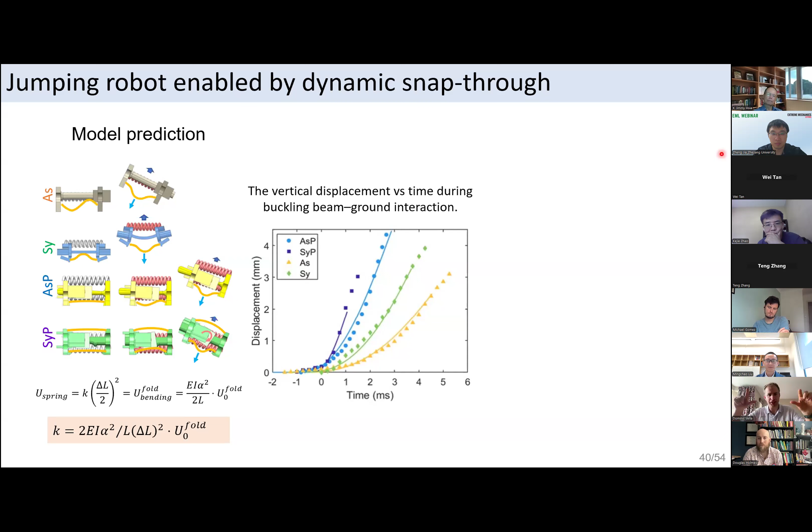Yeah, that's a really good point, and it's kind of what I was aiming at. When we did the spring model, Mingchao showed the restriction height - how much of the arch is sticking out the bottom, this HR here. That's exactly what Doug's saying - what we found is you're better off touching the floor as soon as possible, so you then unload while in contact.

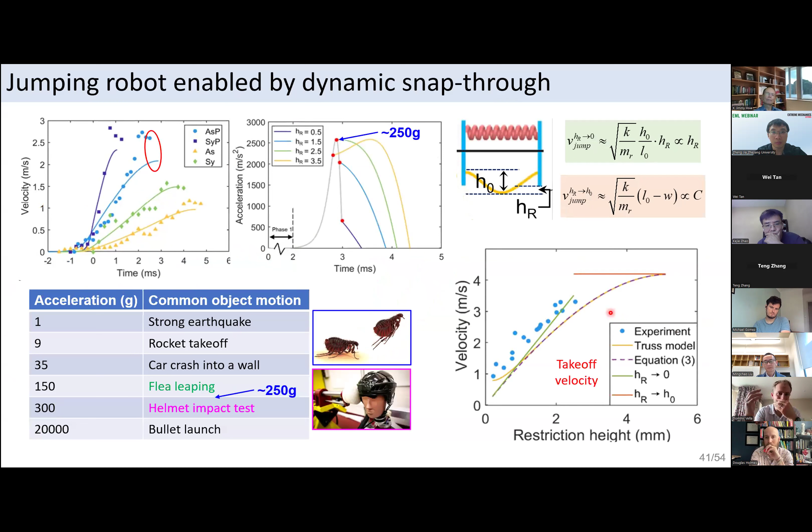Whereas if you snap and go very fast, then you hit the floor, you lose all your kinetic energy and make a big noise, but you don't actually get any jump out of it. So I was wondering if you can distribute mass or bending energy along the beam in such a way that you actually release that bending energy rather than wasting it in hitting.

Sorry, Doug's going to do a demo now. I don't know, I was just going to say it's the same as taking a first popper and having it jump off a table versus off your finger - it'll go significantly higher if it's sitting on top of your finger.

Yeah, I think that's absolutely right. I don't know whether anyone's quantified it, but with the restriction height, it's exactly that effect.

But I guess Doug's finger is great, if you're making a robot, generally it wants to jump off something flat, so you don't get to choose the geometry of your substrate. So you should choose the geometry of your robot, the bit that's actually snapping, so that you get as much energy as possible. I think that's a really good idea.